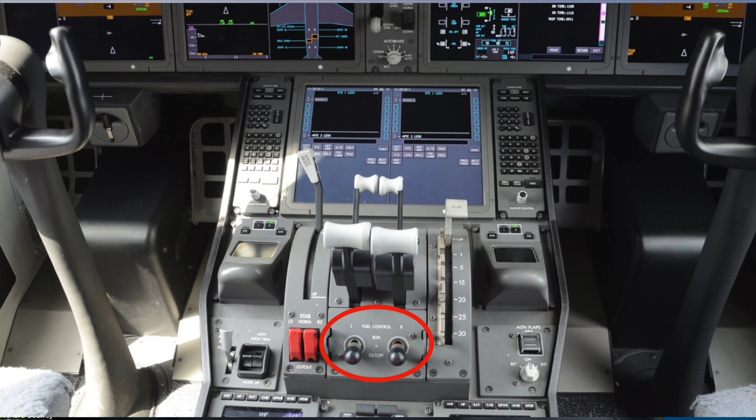The Aircraft Accident Investigation Bureau, AAIB of India, in line with International Aviation Investigation Practice, the ICAO Annex 13, explicitly stated that the purpose of the investigation is to prevent future accidents, not to apportion blame or liability. The report presented factual information collected so far on the aircraft background, sequence of events, the flight recorder data, and technical findings such as the movement of the engine fuel cutoff switches shortly after takeoff. It did not conclude why those events occurred or assign responsibility for them in the sense of pilot error, mechanical failure, or other causes. It did report cockpit voice recorder data, such as a conversation about fuel being cut off, but it did not identify which pilot said what or conclude that either deliberately caused the event.

On the 17th of September 2025, the Safety Matters Foundation petitioned the Supreme Court of India with a 460-page document. The petition, in the public interest, was filed under Article 32 of the Constitution of India, seeking an appropriate writ, order or direction to the respondent, the Union of India and others, to make publicly available the complete data retrieved from the crashed Air India Boeing 787-8 Dreamliner, bearing registration VT-ANB, which met with a fatal accident on the 12th of June 2025 at Ahmedabad, and to appoint independent professionals to monitor the investigation, as the respondents' selective and incomplete disclosure of critical information, coupled with the premature attribution of pilot error while overlooking systemic faults, has resulted in a continuing violation of Article 21 and Article 14 of the Constitution of India.

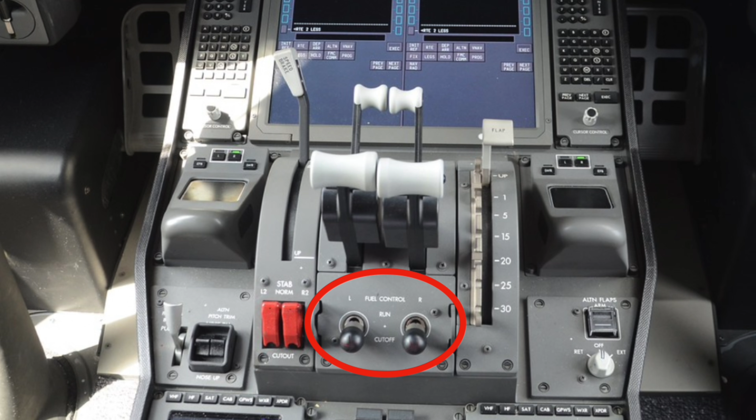The Wall Street Journal published an article on the 11th of July 2025, preempting the preliminary report, titled 'Pilots Are Focus of Probe into India Crash.' The investigation, it says, into last month's Air India crash is focusing on the actions of the jet's pilots and doesn't so far point to a problem with the Boeing 787 Dreamliner, according to people familiar with US officials' early assessments. Preliminary findings indicate that switches controlling fuel flow to the jet's two engines were turned off, leading to an apparent loss of thrust shortly after takeoff, the people said. Pilots use the switches to start the jet's engines, shut them down, or reset them in certain emergencies. The switches would normally be on during flight, and it is unclear how or why they were turned off, these people said.

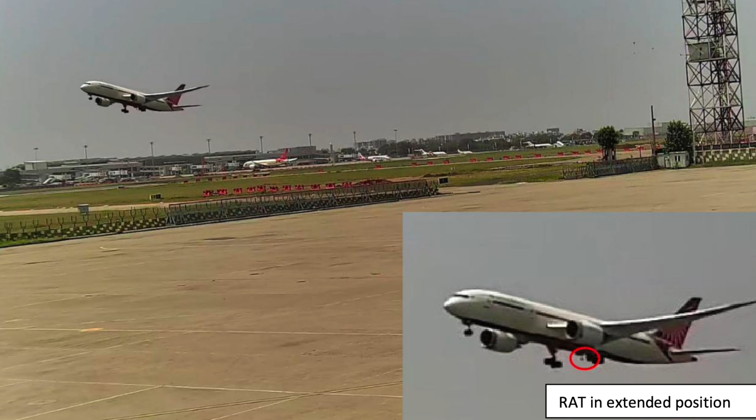The people also said it was unclear whether the move was accidental or intentional, or whether there was an attempt to turn them back on. If the switches were off, that could explain why the jet's emergency power generator, known as a ram air turbine or RAT, appears to have been activated in the moments before the aircraft plummeted into a hostel for medical students in Ahmedabad. No final consensus exists until the final AAIB accident report, which is typically published many months after a preliminary report and after a thorough analysis.

The Supreme Court described the selective leak and piecemeal publication of information that suggested pilot error as unfortunate and irresponsible, and damaging to the integrity of the investigation. The bench emphasized that such leaks fuel misleading media narratives rather than focusing on facts under formal investigation procedures.

On Daily Airline News with Jeffrey Thomas, we have published 120 episodes on the Air India crash. And today we present an alternative explanation to the pilot error narrative. This episode is dedicated to the memory of the Air India 171 victims.

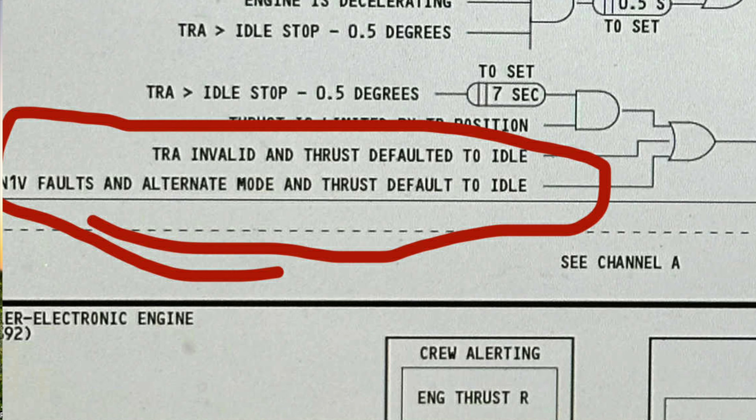Number three, the RAT was deployed, and the preliminary report records that the EAFR data indicates both engines' N2 values passing below minimum idle speed, and the RAT hydraulic pump began supplying hydraulic power at about 08:08:47 UTC. Number four, the Boeing 787 functional schematic for engine thrust crew alerting shows that if the thrust resolver angle, TRA, becomes invalid, the engine electronic control, the EEC, defaults thrust to idle on both engines. The engine indication and crew alerting system, EICAS, will display the message EEC ENG thrust low left and right.

Number five, the captain is reported as having communicated to air traffic control a mayday and stated thrust not achieved. And finally, the sixth observation, the engines were both successfully relit, but insufficient thrust was achieved in time in order to save the aircraft due to the low airspeed and low altitude.

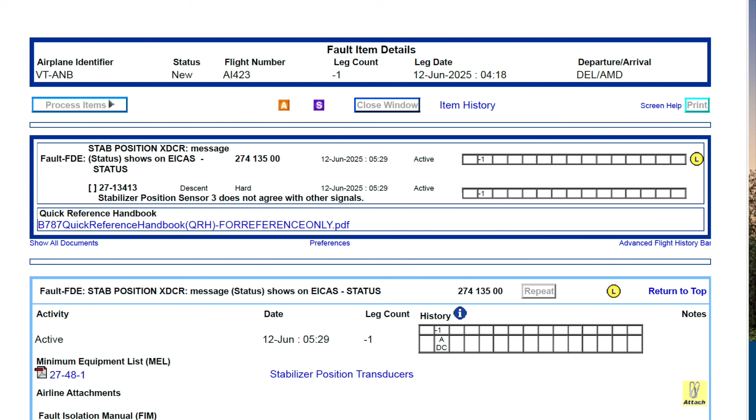Now, there are 5 key events. Number one, there was a fault reported on the previous flight, AI423, at 05:29 UTC, just before touchdown in Ahmedabad. Number two, ACARS message cluster occurred at 07:52 UTC, just after pushback, engine start, and 5 minutes before the taxiing started. Number three, during the takeoff roll, the aircraft reached the decision speed V1 at 08:08:33 UTC. Number four, the air-ground sensors transitioned to air mode, consistent with liftoff at 08:08:39 UTC. And at about 08:08:42 UTC, the engines N1 and N2 began to decrease from their takeoff values.

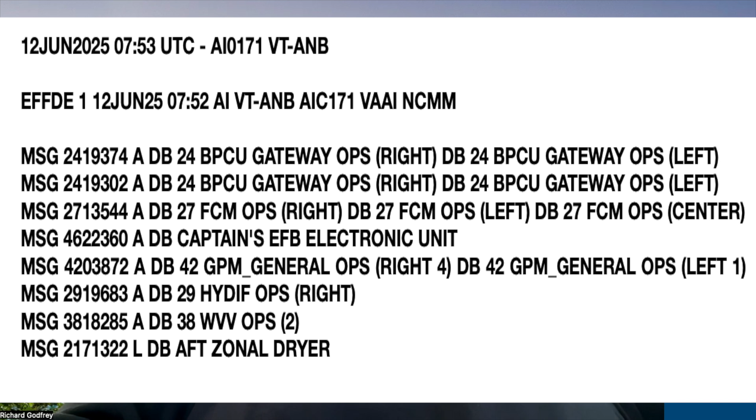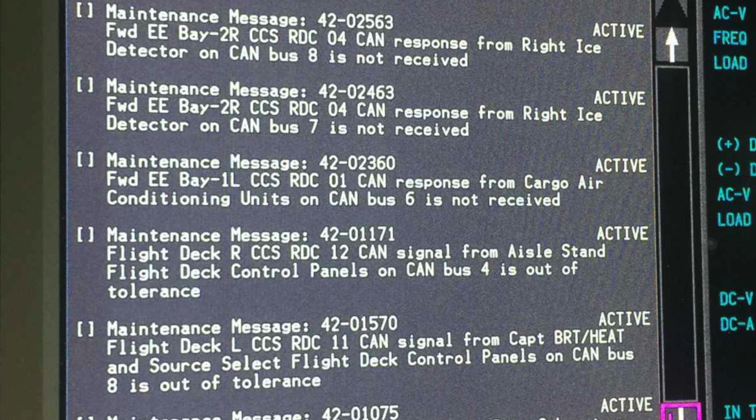Let's focus on the ACARS messages. The message was an EFFDE, Engine and Fault Fleet Data Extract, which means it's a routine download from the aircraft's onboard maintenance system, the CMC. Decoded into plain English, there were 7 active and 1 latched CMC messages.

The first one, DB24, BPCU gateway ops right and left. Two different bus power control unit messages with 2 different IDs, and that can be put down to 2 separate fault conditions from the same equipment. The word gateway suggests a data bus communications issue.

Number 2, DB27, FCM ops right, left, and center. Flight control module items with all three channels referenced means something common to all three: shared comms network, shared power feed, shared gateway, or a central data concentrator. You need the full CMC drill down to know whether it was transient, dispatchable, or a no-go for flight.

The third message, Captain's EFB electronic unit. The electronic flight bag on the captain's side had a hardware issue. Number 4, DB42 GPM, General Ops right 4 and left 1. The general processing module, one on the right side, Unit 4, and one on the left side, Unit 1.

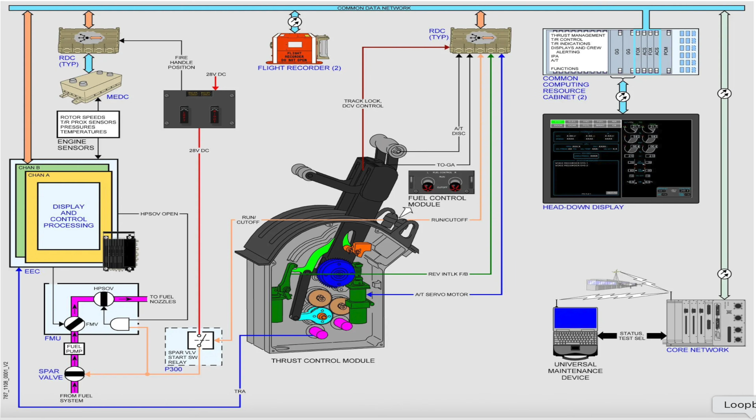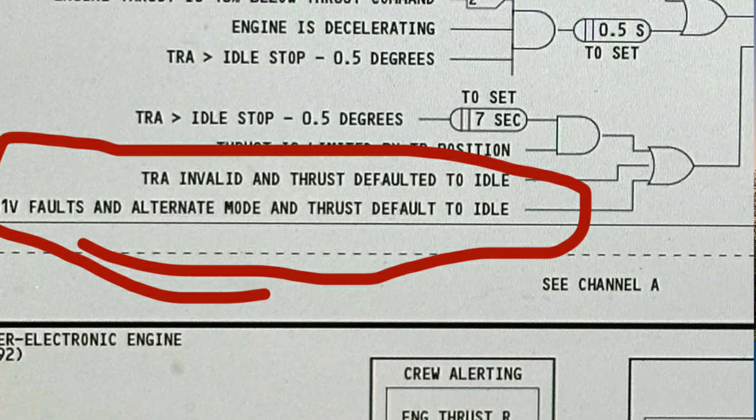The throttle resolver angle, the TRA, from the Boeing 787 functional schematic, engine indication and crew alerting system, EICAS message logic, figure 73-21-04: the message EEC engine thrust low can be triggered by the following path: a TRA invalid and thrust defaulted to idle, and that will bring EEC engine thrust low.

The EEC, the electronic engine controller, no longer trusts the throttle resolver input, usually due to an open or short circuit in the resolver wiring. The resolver to digital converter might have had a fault, and an invalid or inconsistent TRA signal between the channels.

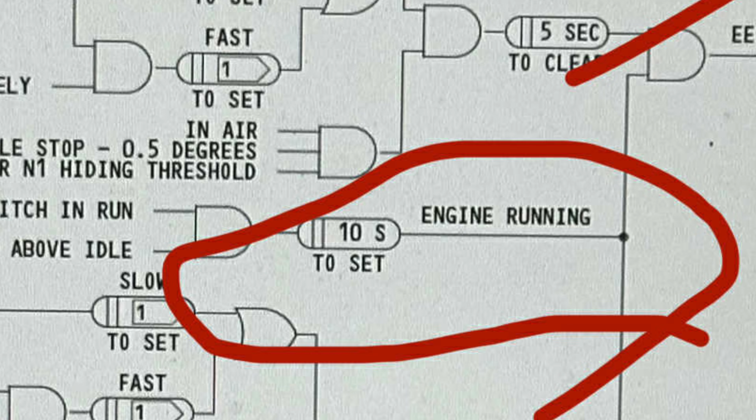When the TRA becomes invalid, the EEC loses its commanded thrust reference. So by design, it defaults the engine thrust to idle to prevent unintended power increase. The schematic shows that the TRA invalid and thrust defaulted to idle feeds directly into the EEC engine thrust low logic path, bypassing the slower 10-second engine not accelerating condition. This means the message can appear almost immediately once the fault is detected, and the EEC transitions to idle default mode.

The EEC engine thrust low EICAS alert indicates that the engine's actual thrust is significantly below the commanded value. If triggered by TRA invalid, it points to a control channel or input reference failure, not a fuel or mechanical fault. The absence of a fuel or mechanical fault aligns with the observation that the engines were both successfully relit, but insufficient thrust was achieved in time to save the aircraft due to the low airspeed and low altitude. It was only 3 seconds after takeoff.

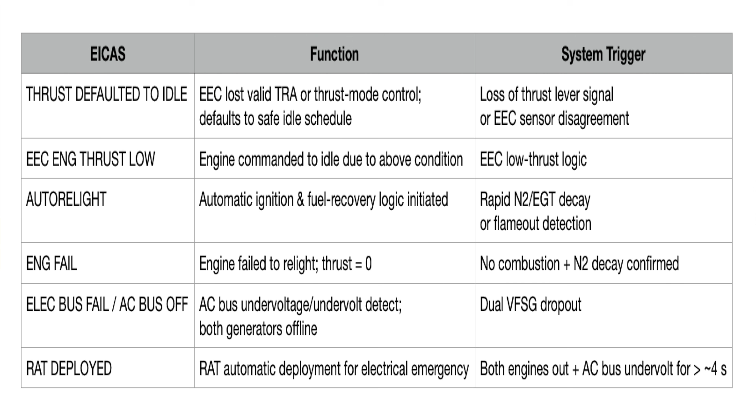If both throttle resolver angles, TRAs, were invalid, leading to thrust defaulted to idle on both engines, the crew would see the EICAS message, engine thrust low, on both engines, left and right. And that condition corresponds exactly to what the captain described over the radio as thrust not achieved.

Now, each GEnx-1B engine on the 787 has dual EEC channels, A and B. When TRA input from the throttle quadrant becomes invalid or inconsistent, the EEC cannot determine commanded thrust, so it defaults the engine to idle as a fail-safe mode. The fuel metering valve, the FMV, drives to the idle stop, regardless of the throttle lever position.

And simultaneously, the EICAS message EEC engine thrust low is triggered by the logic path we have highlighted, TRA invalid and thrust defaulted to idle. The message tells the crew that the EEC is producing less thrust than commanded because it has lost the valid throttle input.

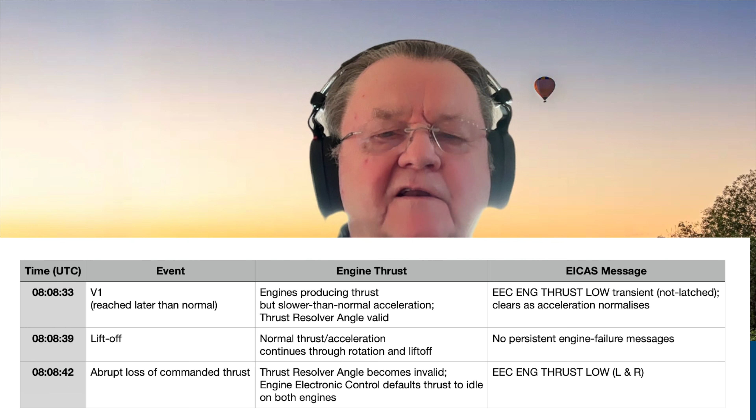Let's have a look at the timing implications. At 08:08:33, V1 was reached, but late. The roll phase acceleration was sluggish, but not idle. The engines were making thrust, just less thrust and slower to build than expected.

This fits the branches of the functional schematic describing lack of engine acceleration, which can transiently set EEC engine thrust low with short set and clear timers without TRA being invalid yet.

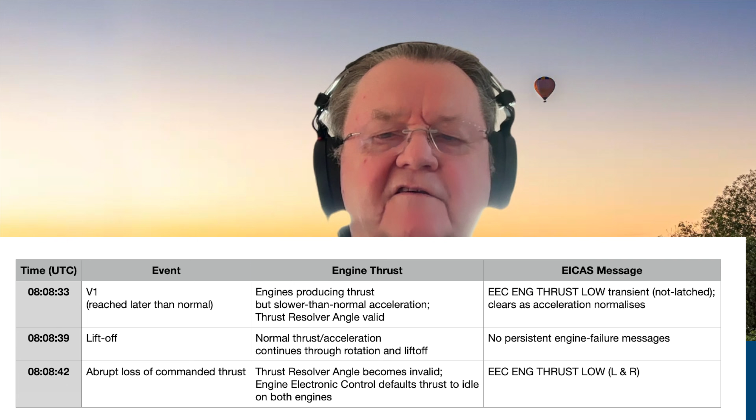Between 08:08:33 and 08:08:42, there were 9 seconds of normal acceleration, including 3 of those seconds when the aircraft was airborne. The engines at 08:08:33 did respond normally to lever commands. That means TRA was valid and the EECs were honoring the commanded thrust in this window.

If an EEC engine thrust low had been set during the early roll, the schematic's 5-second clear path could explain why it cleared once acceleration normalized.

At 08:08:42, 3 seconds after liftoff, a new event occurs that removes commanded thrust. Most plausibly, TRA becomes invalid, pushing both EECs to thrust default to idle. From the cockpit, this is when thrust not achieved becomes obvious in the climb.

Now let's consider the engine electronic controller, the EEC. The fail-safe behavior of the GENX1B EEC is described in this section, both under normal conditions and when the data communication with the Common Computing Resource, the CCR, is lost.

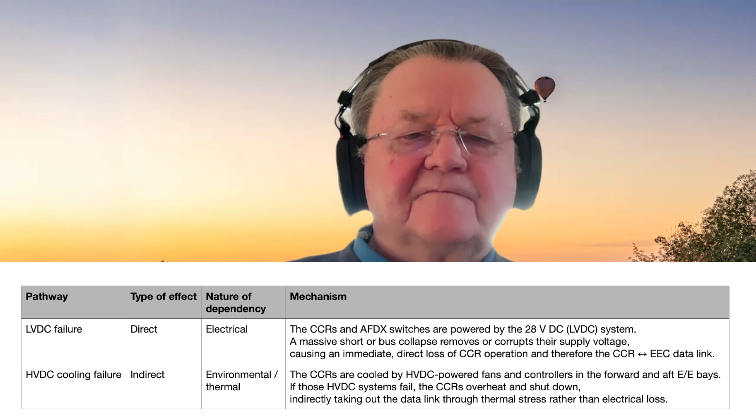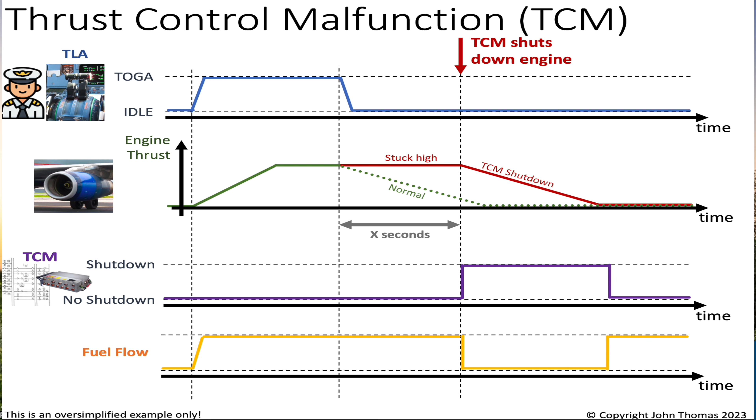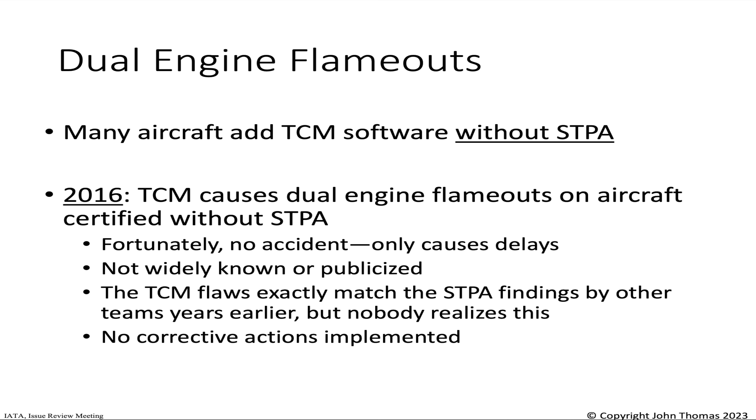The LVDC and HVDC are separated, but both have automated bus tie capabilities as redundancy backup in the event of a failure.

If on rotation of the aircraft, the water damaged the power panel P700 or P800 in the aft EE bay, providing HVDC power to the E5 and E6 equipment racks, then cooling to the forward and aft EE bays would cease. If only one HVDC side failed and the HVDC bus tie successfully backfed, LVDC might have survived. Then you'd need an additional short on the remaining side or a tie lockout to explain a full CCR power loss.

A pure cooling-only path, the HVDC fans off CCR overheat, is too slow to explain an immediate rotation event rollback. Cooling explains later degradations, not the initial dual rollback. The smoke seen on rotation is evidence, in my view, of an LVDC massive short, and the LVDC massive short is the direct electrical cause of the CCR to EEC temporary data link failure.